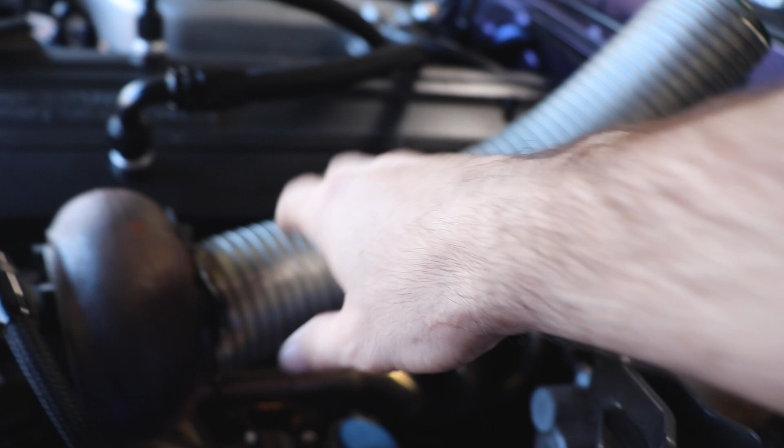We've also got a wideband showing up, and you might be thinking what the fuck is going on here? And you'd be right to think that, because this is just temporary. There's a huge exhaust leak down there. This is just to get most of the exhaust away from the valve cover. That's its only purpose. It's not going to be how our exhaust is set up for when it's actually driving once we get it tuned. It will be similar though, I'm not gonna lie.

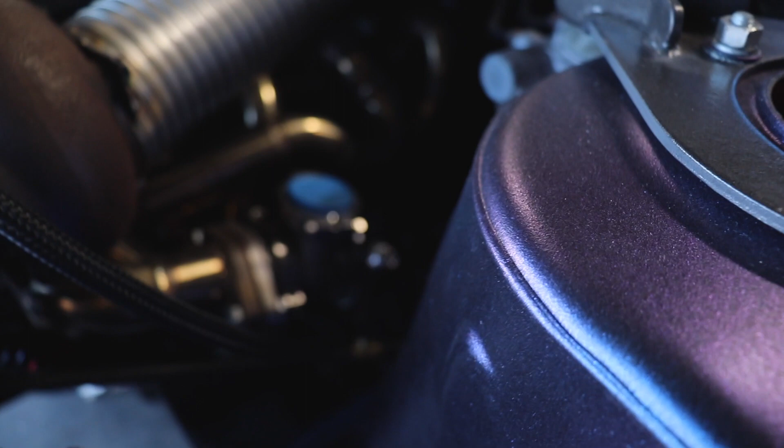We don't have our wastegate hooked up as far as screamer tube, but it is hooked up with the turbo, so we shouldn't have any boost leaks down there. We've got a boost controller here, and our boost controller is wired into the ECU, so that should be good. So now we can go into the software and take a look at everything, make sure everything is set up the way it should be.

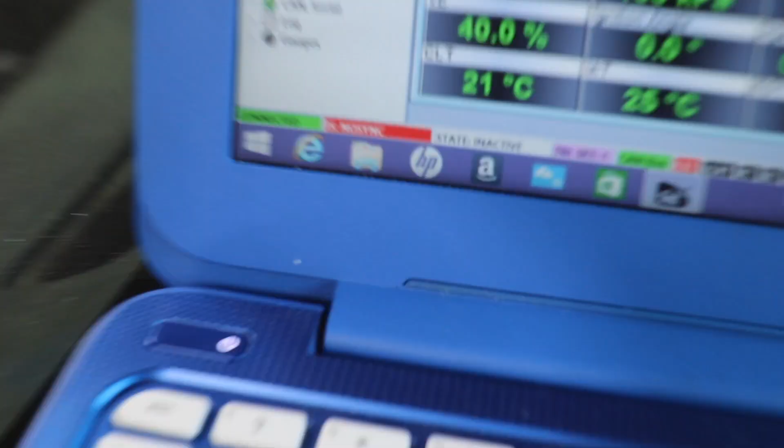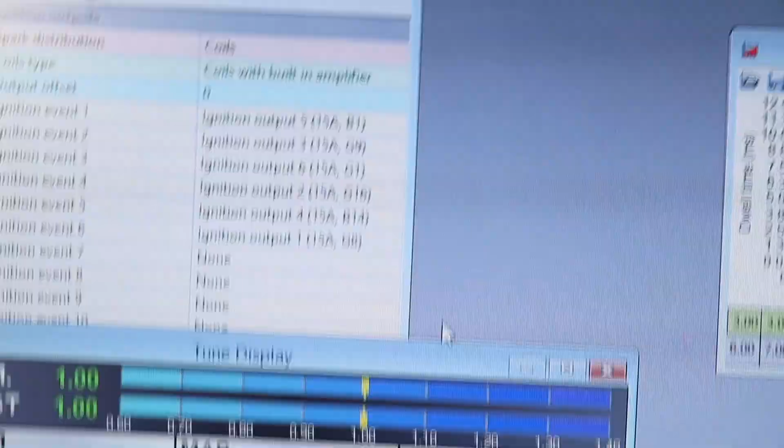Okay, so this is the software for it. We've got our ECU connected. I went through and changed a few things on the ignition. I changed it for the LS coil packs. They're allegedly 3 ms is where they're supposed to be, so we'll find out, I guess. I put the firing order. The coils have the built-in amplifier, which is basically the igniter, and the firing order is 153624, but you have to input them offset, so you put 536241.

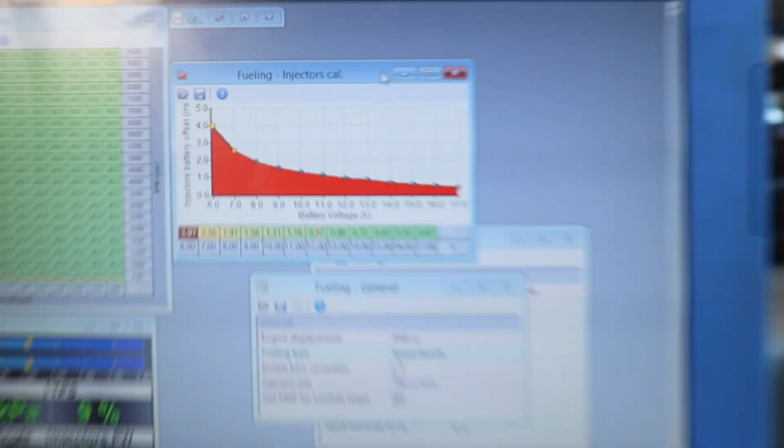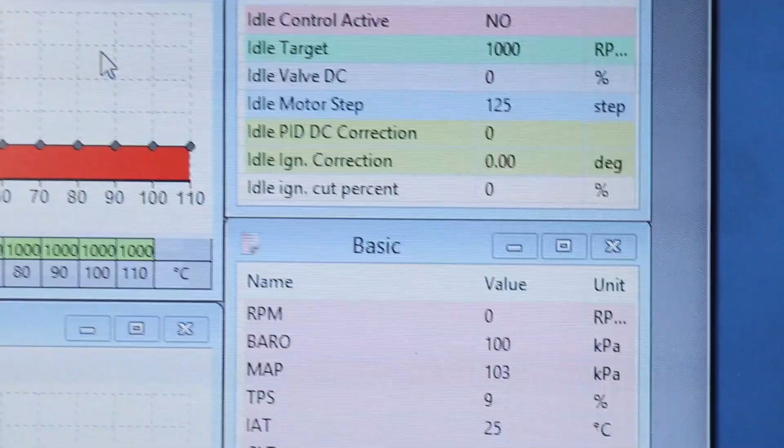We've got our idle control active. We've got that turned off because our air idle control valve is not plugged into the intercooler piping, so it's not going to be doing anything. It'll just be a massive air leak if we leave it unplugged like that. And we turned off batch all injectors right here, because that just means that every injector fires at the same time, and we've gone up quite a lot from the stock injectors, so we don't want that. That's squirting too much fuel into there.

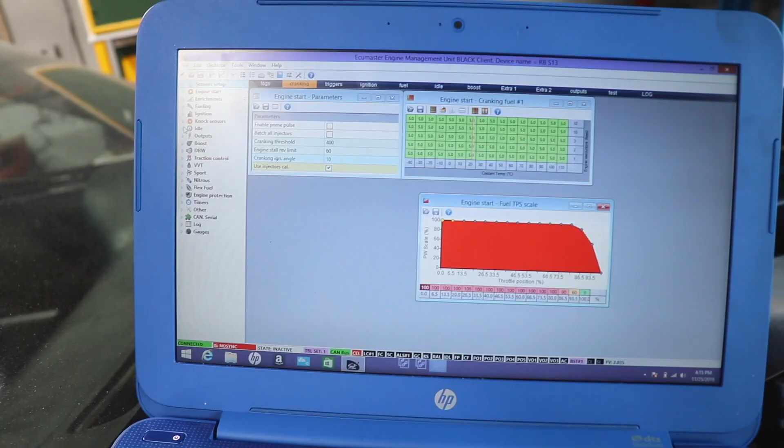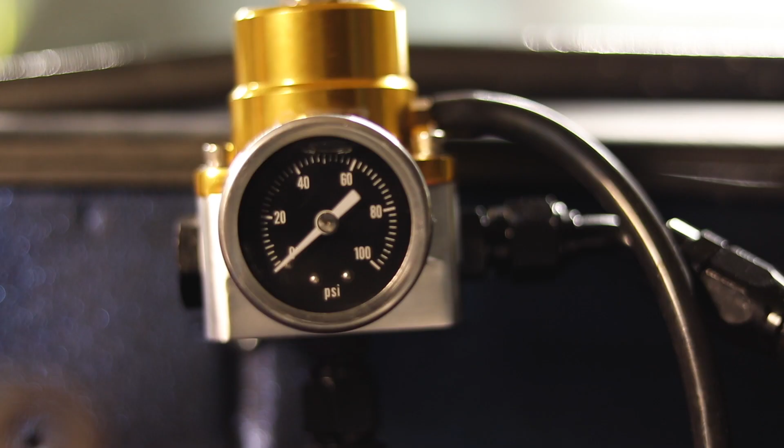But yeah guys, I believe that is all that we need. I think we're ready to start. So now let's just try. Let's give it a shot. Two hours later.

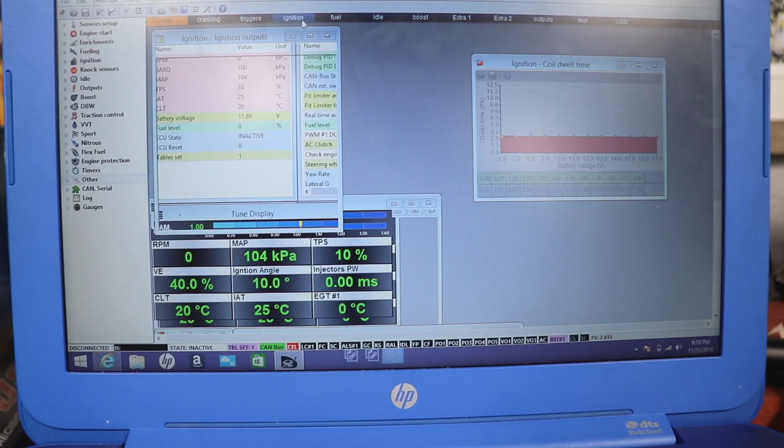Alright, so I've been trying to figure out this tuning software, and I think I've got things set like the coil packs and the fuel injectors. I went off of the paper the fuel injectors came with, so I think we have that set. I think we got the coil packs good. I don't have it connected to the ECU right now, so that's why it says disconnected, but that blank square that says IS, that's the ignition system.

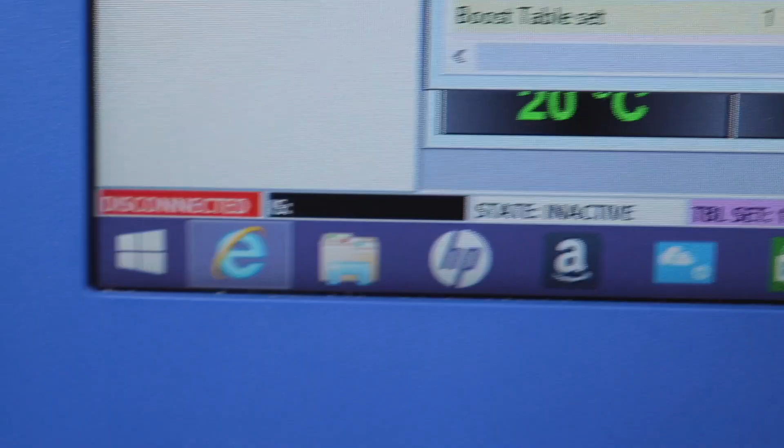For some reason I can't get it to sync with the car, so I have to figure that out, and we can't get that state to change from inactive. It should go to, I believe, cranking or something like that. For some reason we can't get that, and it's getting late. It's only 9 p.m. but Martin is in China, so he can't really help right now because of the time difference.

So we're gonna try again during the week, and hopefully the next time that we give it a shot, I will have my air intake temperature sensor as well as my wideband, and I can get those into the car, and hopefully then we can get her running, get her idling, work out all the kinks, and then get it ready to be driven. Alright guys, I'm gonna end it here. Unfortunately we couldn't get her started today, but hopefully we'll have her running this week.